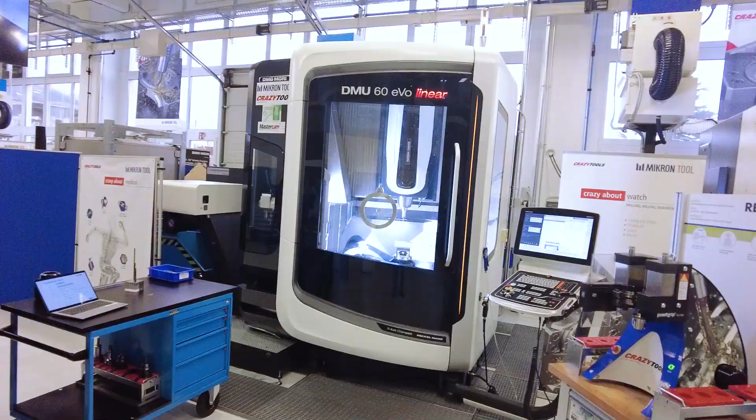What we do here is we develop all manufacturing solutions that we can deliver to our customers. We develop crazy tools, cutting tools, of course, specific for tough materials, tough applications, but also we develop complete machining processes, which can also be implemented by our customers.

In a previous lifetime, I had the great opportunity to work with some of your tools, and I was drilling titanium at about, I want to say, 0.25 millimeter. And everyone says, you must peck. You're going 50,000 RPM. And I gave my friends at Crazy Drill, you guys, a call, and I was like, hey, I have a problem. Can you help me? And sure enough, we plowed right through it, through titanium. My mind was blown, and when you guys gave MTDCNC a call in partnership with Rego-Fix, I was super excited to be here. Do you have any examples like that?

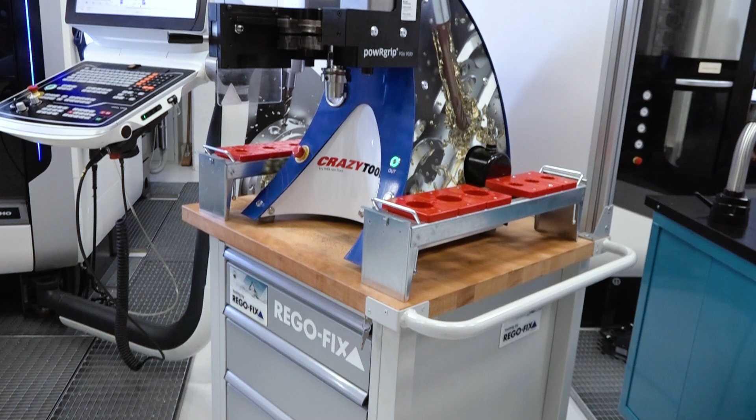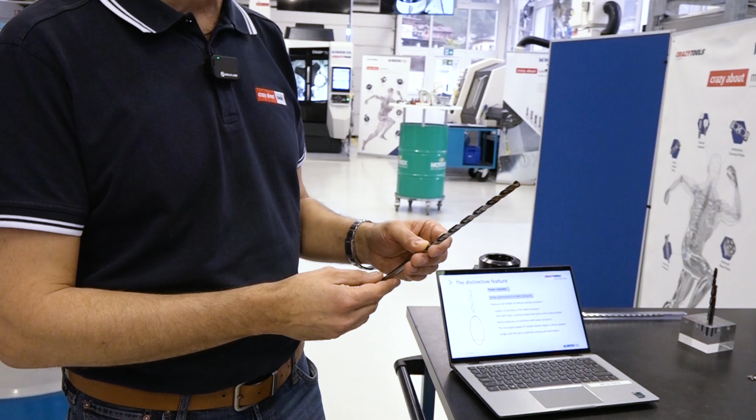Yeah, of course. So first of all, problem solving is really our daily bread and butter. We deal constantly with highly difficult requirements from customers. We have right now drilling in stainless steel, 316L deep drilling, and we can show this. We have a specifically developed Crazy Drill Cool for stainless steel. Wow. With a specific design of the cooling channel, we could improve the coolant flow by 4 times. This allows us to increase the cutting speed significantly, and the feed rate. So our customer now has a very efficient drilling process.

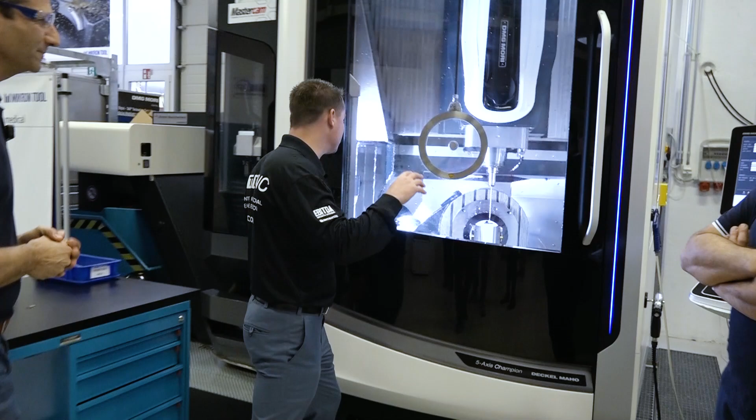Have you ever heard the saying, seeing is believing? Yeah. Can we take a look? Did you set something up for us today on the machine to see this? Yeah, absolutely. That's ready for you. Let's invite the audience in to take a look. Is this going to plow through that material? Yeah, of course. We are not pecking. It's one-shot drilling. And we have 250 surface feet per minute and 20 inches per minute feed rate.

Alberto, are you like me in the sense that something like this, one, I get chill bumps, and two, I find it so sexy. Do you find machining sexy? Yeah, of course. We also find tough challenges really sexy. We love to machine tough materials. Sometimes it's a headache, of course, but we challenge ourselves, and we love that customers challenge us so that we can develop crazy tools. Well, you're a genius along with your team, of course. Let's not leave them out.

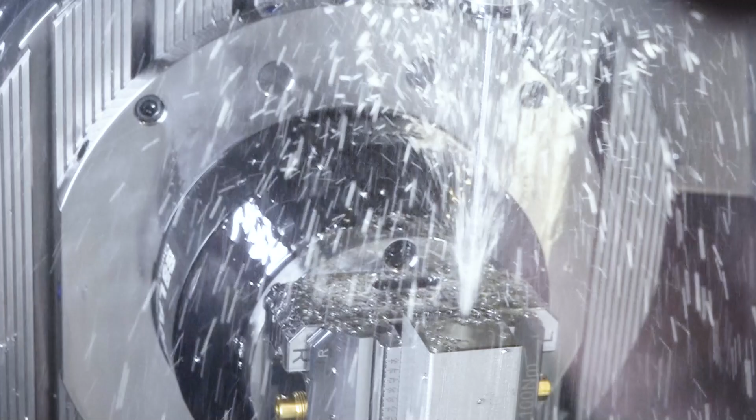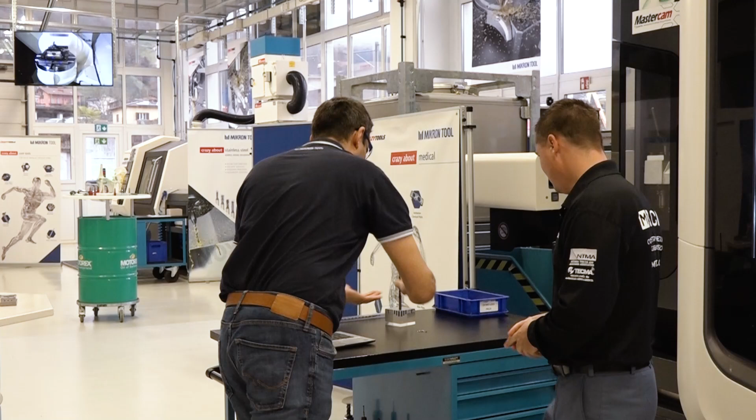You're a genius that helps create ideas and concepts that have traditionally been done in other ways. And this drill is so long that I would relate it to the gun drilling that I used to see. Is that traditional? Yeah, actually the request was to have something different, a real game changer related to gun drilling. So the idea was, okay, let's reconsider this process and develop something totally new, having massive coolant flow and a cutting edge design. This allows us to have short chips and perfect chip evacuation. For example, these are the chips we get on those materials, which was not the case before the development of this tool. It was long chips, high heat generation, so it was really a headache for the majority of our customers.

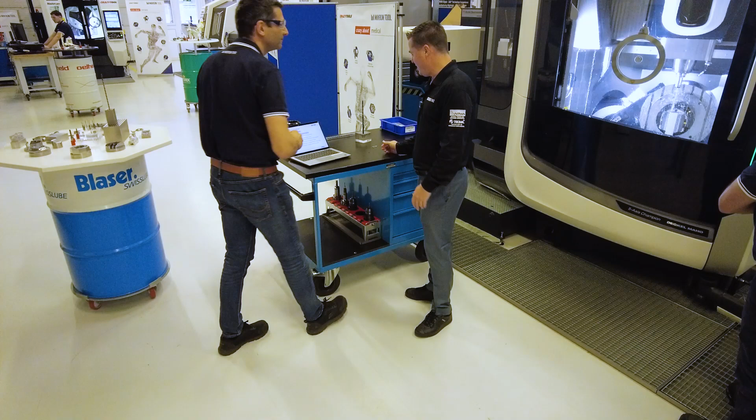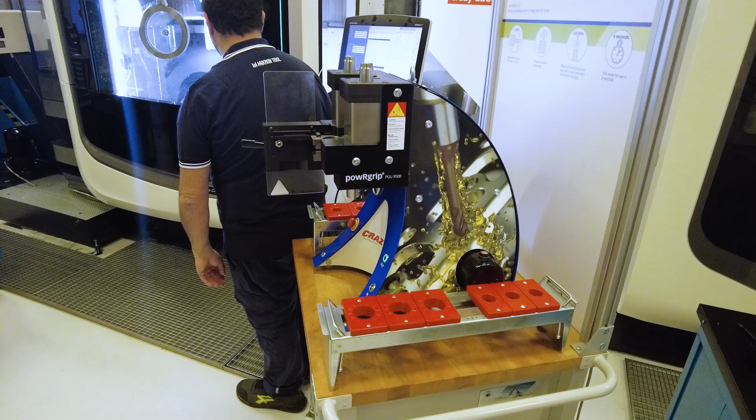Alberto, I'm going to tell you a little secret about me: when I walk around machine shops, I look in chip bins all the time just to see the answers to some of my questions. Correct. You can learn so much from a chip, can't you? Absolutely. The color, the shape, the size tells you a lot about how efficient your process is.

Well, it looks like we have a whole, I'm going to pull out my Aladdin, magic carpet ride. It looks like we have a whole new world over here as well.

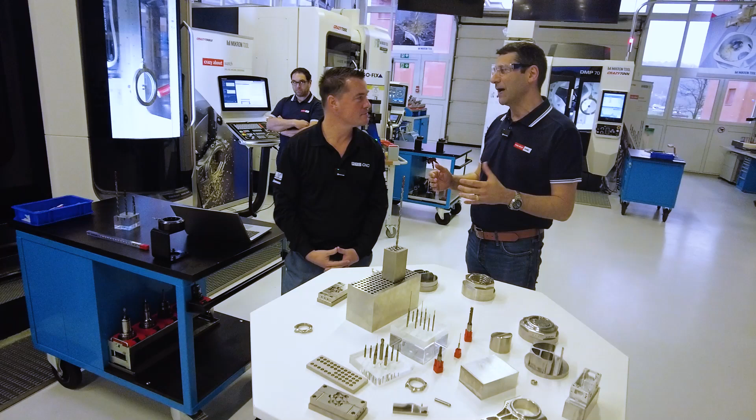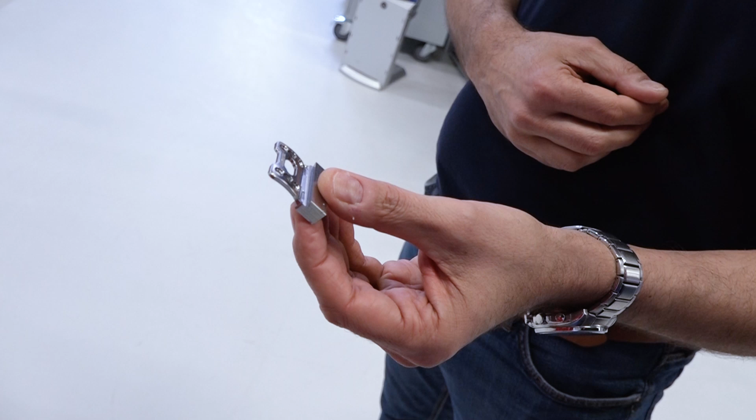Yeah, of course. Do you have some more setups for us to look at? As I told you, besides developing cutting tools, we are more and more involved in designing and developing complete machining processes. So, for example, we offer our customers to develop their machining process. For example, here we have a titanium medical part, a so-called anterior cervical plate, used for spine surgery. For our customer, we have developed the complete machining process, of course including a dedicated cutting tool solution. So we can have a look at how we proceed in such a project.

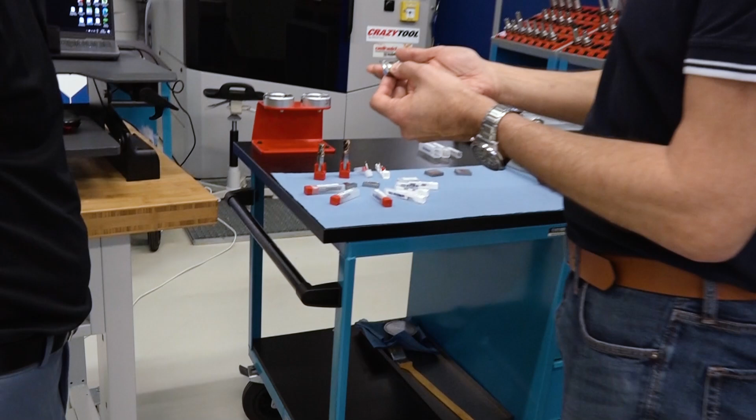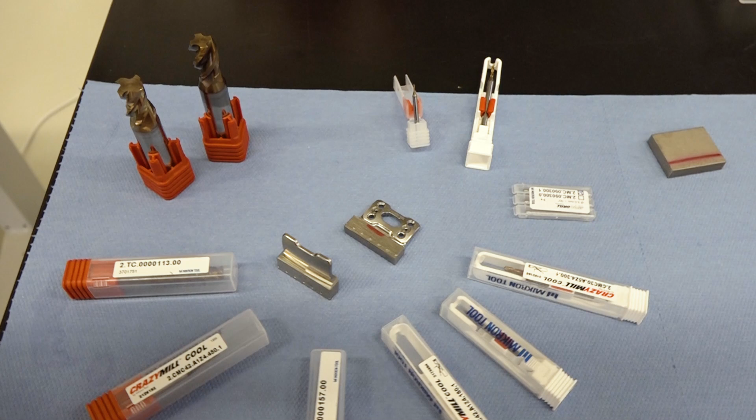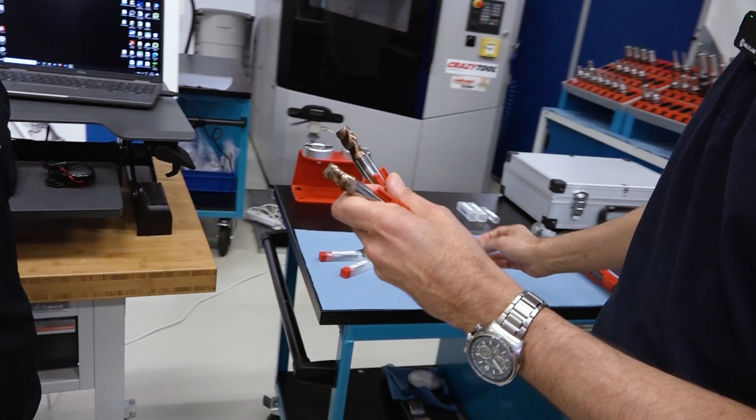Of course, we start by analyzing with CAM simulation, which allows us to design the machining strategy and the process. And then we go to the design of specific cutting tools to improve the machining of the part. For example, the majority of the milling time was dedicated to the finishing process. So to significantly reduce this finishing time and the overall machining time, we developed dedicated solutions, for example profile mills that allow us in a few seconds to generate a very nice shape with an extremely accurate surface finish.

We could improve the surface finish from 0.4 micron Ra value to 0.15. That means from 16 to 6 microinch, and we reduced the machining time by 85% in finishing. The overall manufacturing time we could reduce by 40%, from 15 minutes to 9 minutes. That's really a game changer for our customer. They can produce more with the same machine, or they can increase their annual volume significantly, reducing the manufacturing cost. Even if it's medical, the pressure on cost is high, not only on automotive parts.

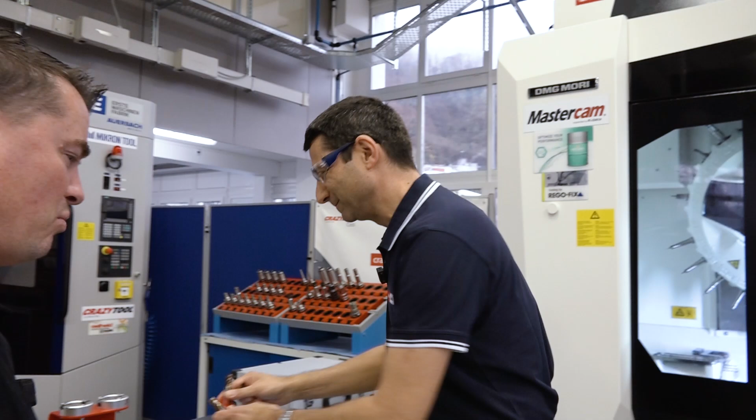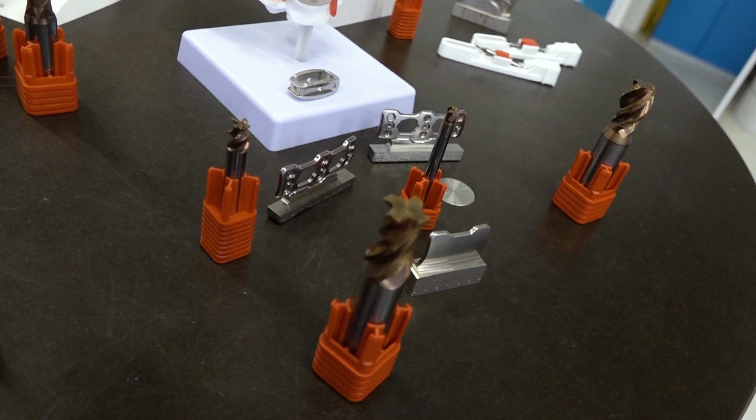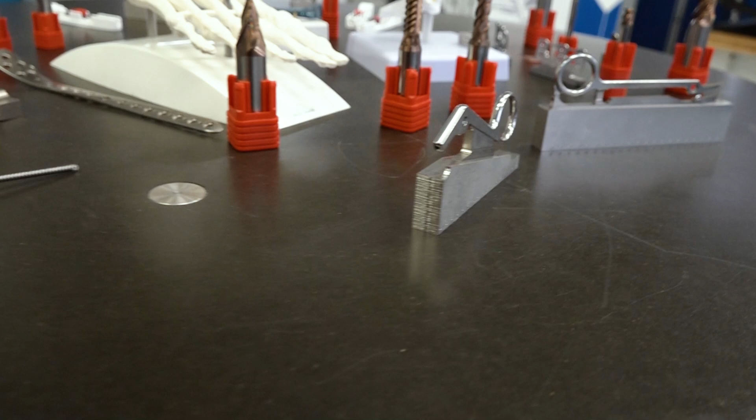Alberto, the way you describe this, although we've walked into Mikron Tool and you've shown off some of your amazing cutting tools already, it almost seems like you're a solutions provider that receives a request from a client that's having a problem. Yeah. And you go, we're gonna figure out a solution for you. And making tools is maybe the second or third supporting aspect to creating the solution for that partner. Is that what it is? You are absolutely right. Yes, of course.

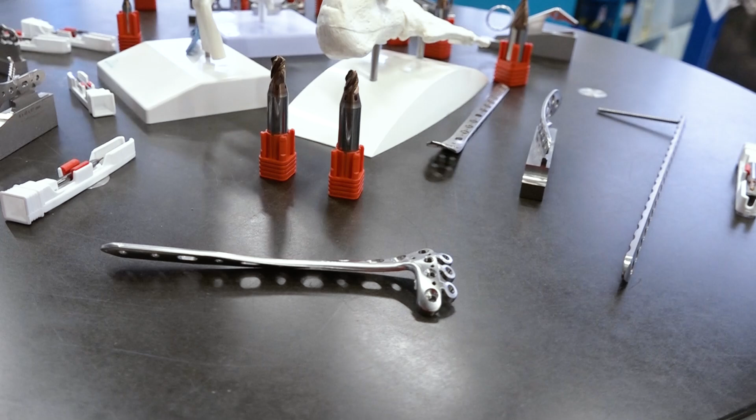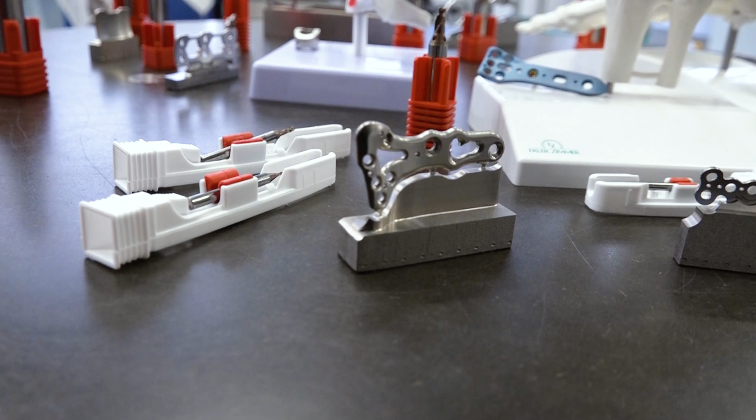If we want to significantly improve our machining process, we need to consider all elements in the process: the machine, the cutting tools, the tool holders, the coolant, the programs, the strategies we apply. Only if we consider all elements in a holistic way can we really improve processes that have been used for decades. People say we did it the same way for the last 10 years, how can you improve this? And the crazy thing is that we normally start to think out of the box. Let's say, okay, let's try something new.

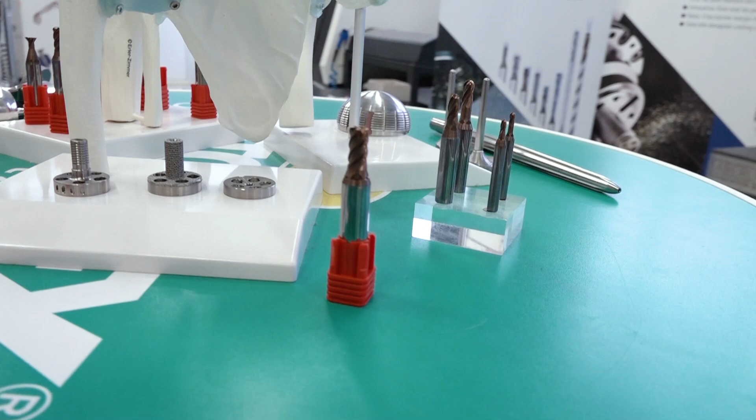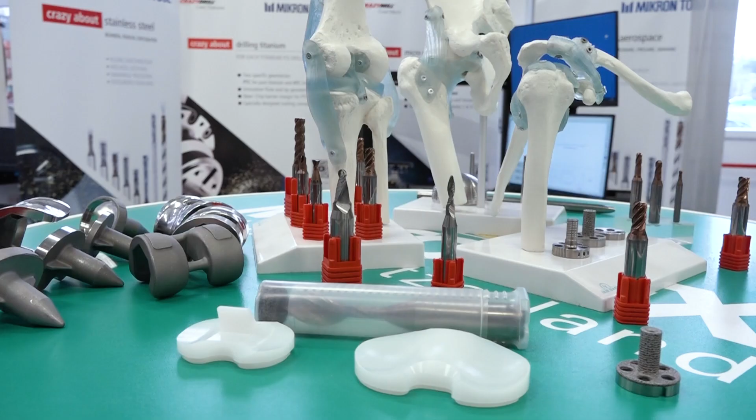Let's try a new cutting tool solution. Let's try a new strategy. Of course, in consideration of the machining requirements of the customers and all boundary conditions. We need to consider what the customer wants to use, of course. But besides that, we are sometimes really crazy, and we jump from one idea to the other, and then we mix it all together and provide a complete solution to our customer.

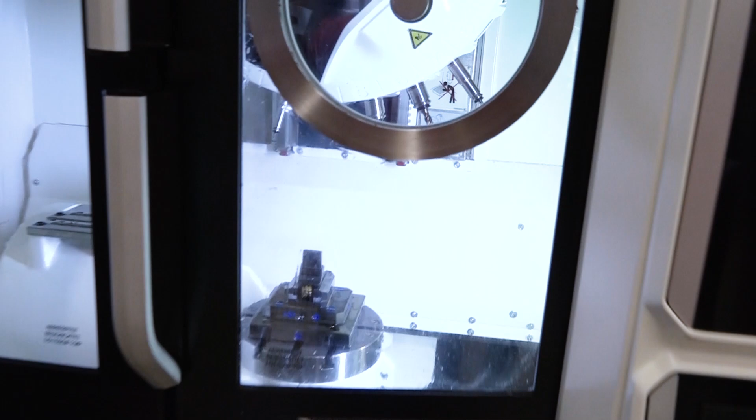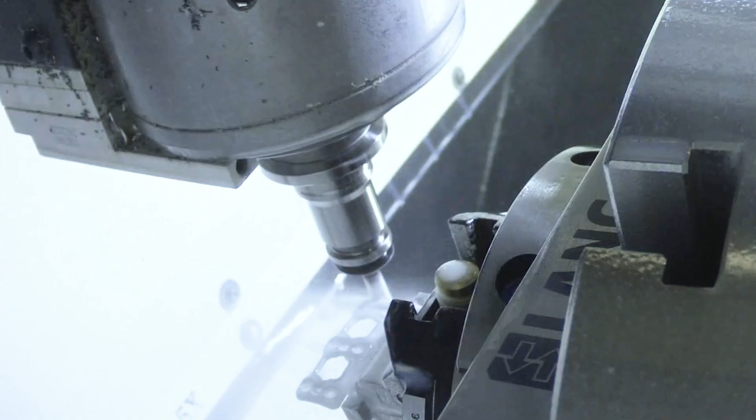Let's have a look at the machining. Yeah, you can start the machining. That's real life. This is titanium grade 2, low profile clamping, and we start, you see, with the roughing operation. We have coolant through our tools, so even in milling we have a really highly effective flow of coolant. It is titanium and the coolant right now is oil; you see we have the flow, which allows us very high cutting speed. We have no risk of overheating of the cutting edges, no overheating of the part.

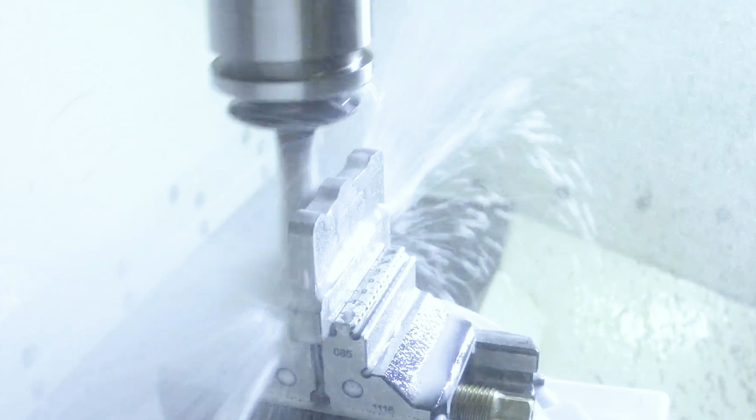And for example, even in drilling operation in titanium, such a thin part, our customer had a problem that in drilling, you have a high risk because of the feed force of the drills to displace or deform the part. So we developed a new cutting tool, a new drill specifically designed for titanium to reduce the feed force to allow us to drill thin wall parts like an orthopedic plate. And that's also a new approach, considering all aspects, considering all requirements of the process.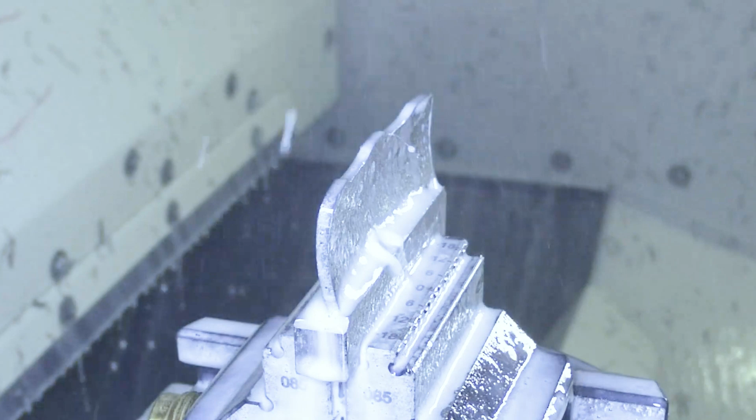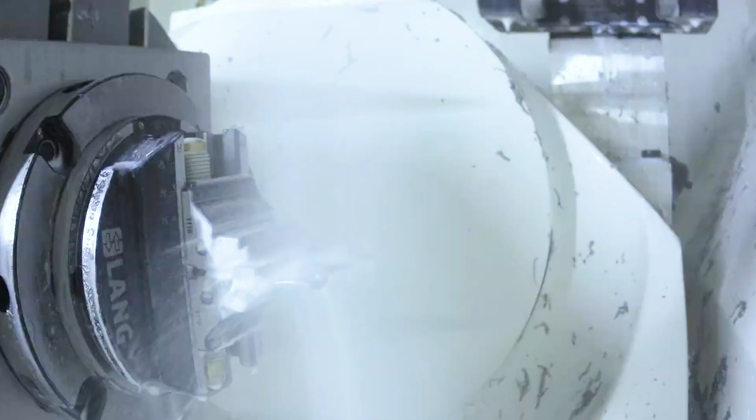Right now, here we have our convex mill. So you see, now we are finishing the surface in just a couple of passes instead of using copy milling by ball mill, which was about 3 times more time. And you see, this is a very compact machine, a small spindle, but you are able to apply a large tool because also the cutting strategies are, let's say, tailored to the machine size.

Alberto, they warned me I was going to walk into something crazy. Yeah, and you have proven that to be true. I hope now that we can show to you and to your audience that, of course, reconsidering processes and taking the time and really thinking sometimes out of the box may be a dramatic advantage for customers.

Yeah, there's so many thoughts that are going through my head as you're describing, and I didn't want to interrupt you at all, but one of my least favorite sayings in the whole wide world is, we've always done it that way. It is one of the more frustrating things. That is not how we succeed. We must embrace companies like Mikron, like you guys, and say there are possibilities out there. I mean, so beyond frustrating.

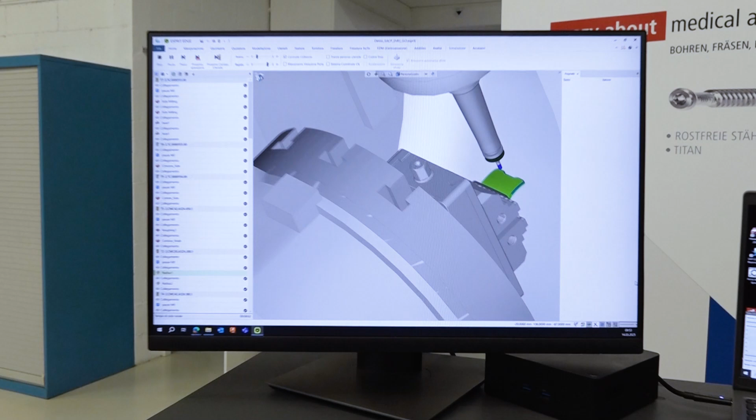And I know we're gonna go to the measuring area over here. Yeah, and the other thing I want to bring up, Alberto, on the way to the measuring area is I'm actually walking around with a cracked rib right now. So thank you for working on the medical stuff for us, because as my knees and ankles get worse and worse, I'm gonna need you in my life.

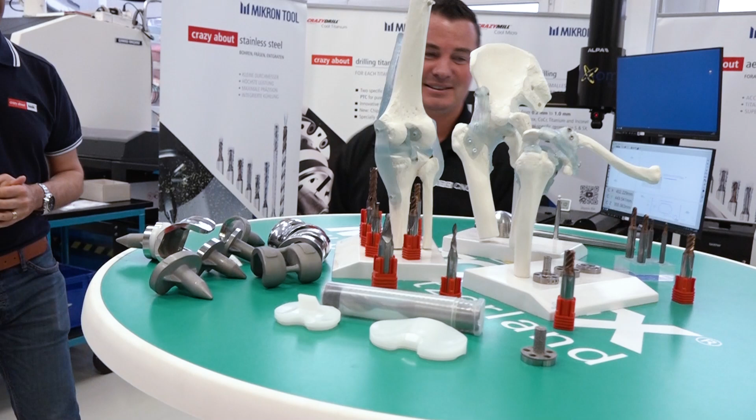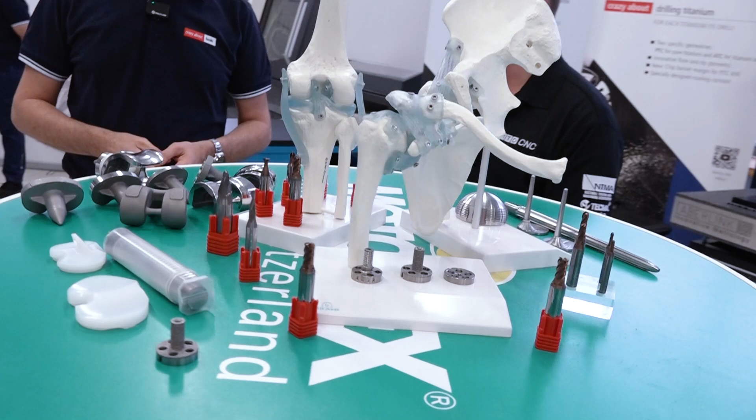Hopefully not, hopefully not. Of course, here we have a bunch of examples. For example, knee implants, shoulder implants. We have hip implants, and that's the major, let's say, high runner for orthopedic companies. And of course, we need replacements. We need spare parts in our bodies. People do a lot of sport. People get older and older. We need those kinds. And for us, it's really a nice challenge to improve these machining processes.

Yeah, thank you for doing that. These are all things I believe are going to be my body very soon. I might be the next Iron Man, next Bionic Man. Maybe without all the cool weapons, though. We can make it a new Avengers. I like that. Anything you want to describe on this before we slide over to our next area? People doing this for us. Oh my gosh, and what's his name? Marco. Marco, thank you so much for being here, my friend.

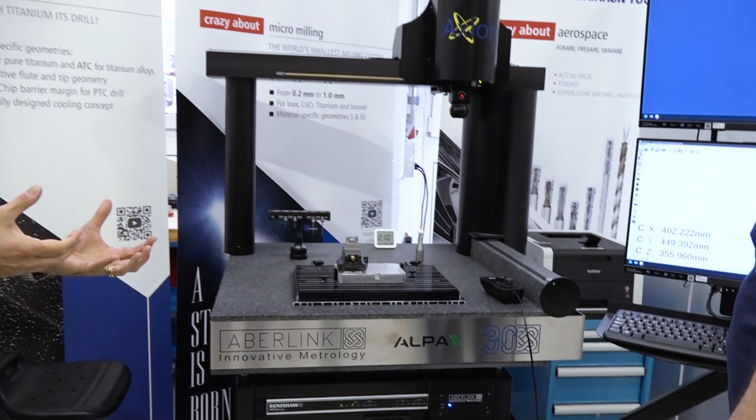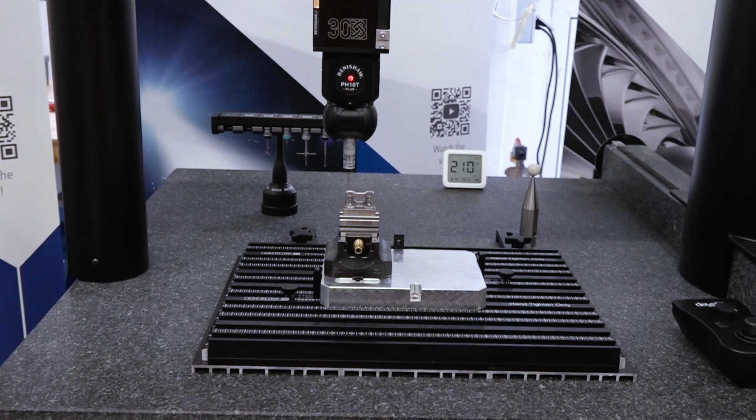Okay, let's have a look. Of course, what we do for our customer, we need to check if we can achieve the quality in the precision of the part, the surface quality. Of course, customers want to improve the machining process with the same quality of the part or improve the quality of the parts. That's our goal. So by CMM, of course, we need to check all critical features of the parts according to the requirements, so that we can deliver a pre-validated process, even for

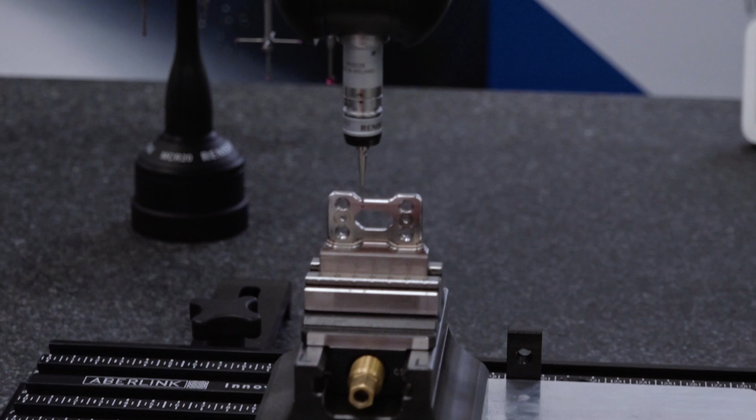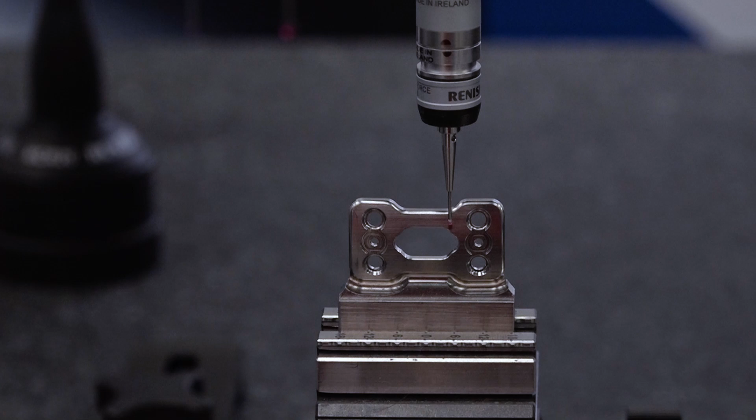medical companies. What we do, of course, is not the final validation. This will be done at customer side, but we do a pre-validation of the process. We can check the process consistency. It's not just a one-time process. It's a multiple-time process that we test. So we normally do several tens of parts, so that we can evaluate the process consistency along several machining hours.

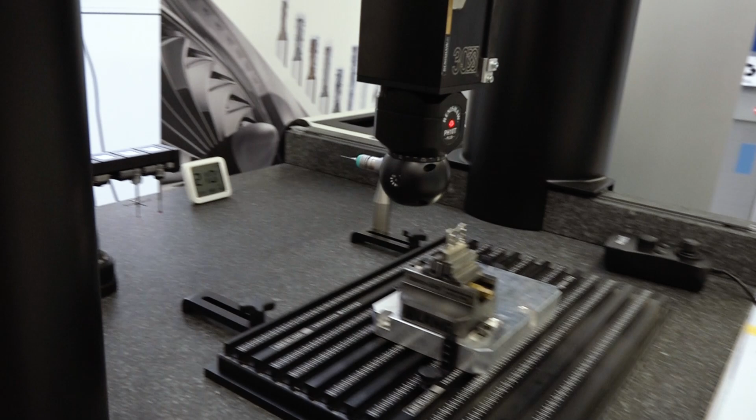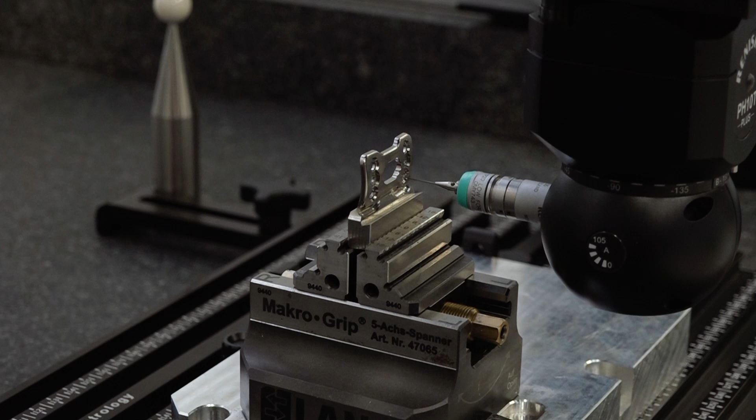I'm impressed, my friend. This tour has been incredible. I know there's so much more to show off here. Of course. You have, I believe, several of your colleagues that are going to continue to show us other areas of Mikron Tool. Absolutely. Because here is actually the final of the process. Are we going in reverse? Yeah, we go reverse, of course. We go where we use the tools, and now we go to see how we make the tools, the crazy tools that are so efficient and high performing in the most challenging applications.

So since we're going in reverse, you may not have noticed, but maybe I should put these back as well. All right, my friends, let's head off to the next area. Okay.

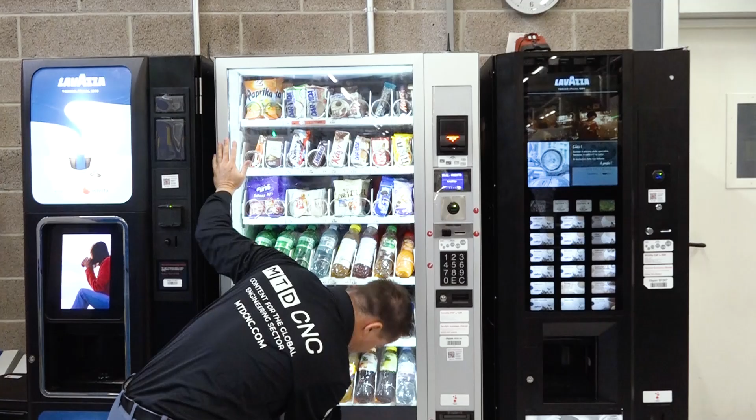Hey, Tony. Yeah, what are you doing here? Are we here to get snacks?

No, let's go see the production. You have to learn about our production! Oh, I would love to. There's a whole lot of beautiful blue machines here. But I thought we were here to get snacks. No? Later. Okay. So production and people, I think, are really important to Mikron Tool, right? So I show you our crazy tools, and now you have to learn how we do this.

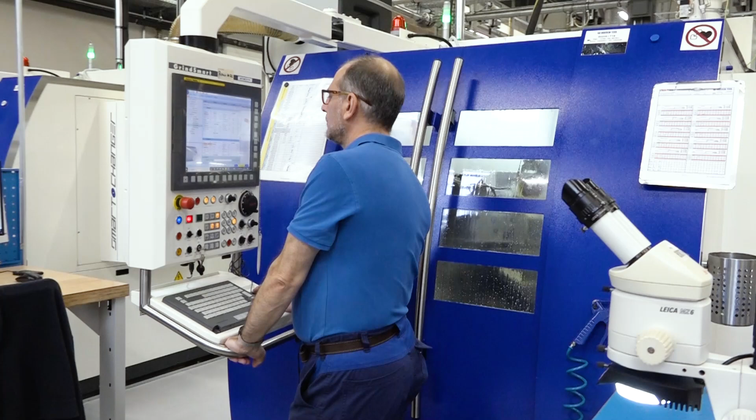Extremely high-performing cutting tools, high quality, of course. So to do this product, we need really state-of-the-art grinding machines. We need the right grinding wheel. We need the right programming. But all of this is useless without the highly skilled people. That's a fact. And when we hire people, even if they already have really good experience, it takes 2 years to get to the level that they can do the highly complicated cutting tools.

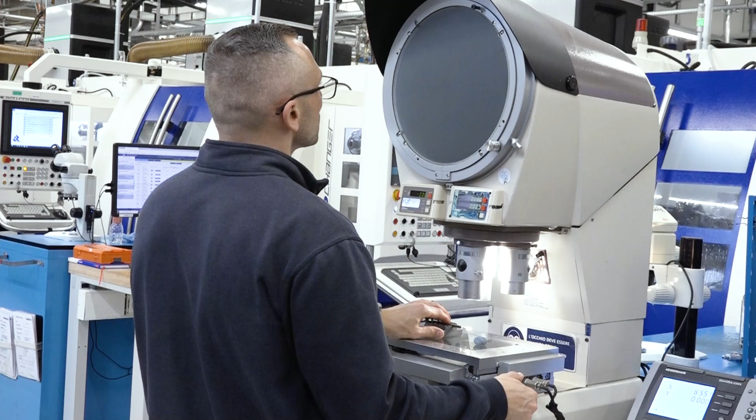Wow. Yeah, it's a really long journey for people to be able to approach, let's say, the craziest cutting tools we do, of course. We're repeating that word a lot, aren't we? That crazy word. Yeah, a lot.

We invest a lot in training, of course. We invest a lot in machinery, but we need to merge this together so that we can achieve the highest level of precision and quality. We've used the word crazy a lot. You mentioned the investment in people, the 2 years of training. How do you find people of this level? How do you make sure? You're making tools that no one else on this planet has maybe even considered making. What is the process of making sure that everyone is on the same page?

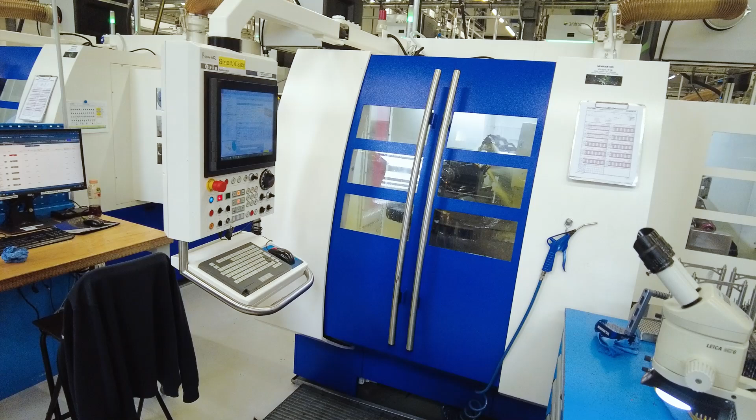Of course, we have different on-the-job training programs for operators and for young engineers. They have an initial contract. For example, young engineers have an 18-month program, and they see the complete production, the complete company actually. Young engineers also spend 6 months in our location in Germany or in the US, so they have an experience outside the company. That's really significant for us. It's the only way to find people, but also to have people that remain with the company for a long time. Yeah, that's the key factor.

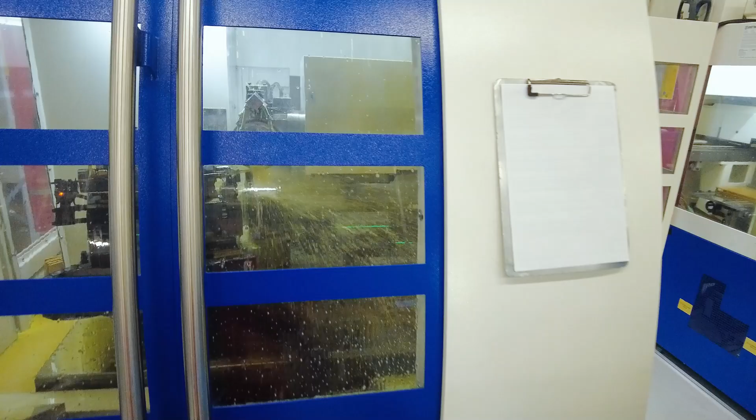It's not easy these days, and to hear you invest in your people, I want to expand on that a little bit, if it's okay with you, Alberto. We've had that discussion where your client is super important. You're providing a service to help them resolve an issue. The tooling is obviously important. We see machines all over the place; it feels like there's hundreds in here, right? Yeah, about hundreds. So knowing you have invested so much in your people, can you describe what the organization has created for all of the amazing people here, the relationship?

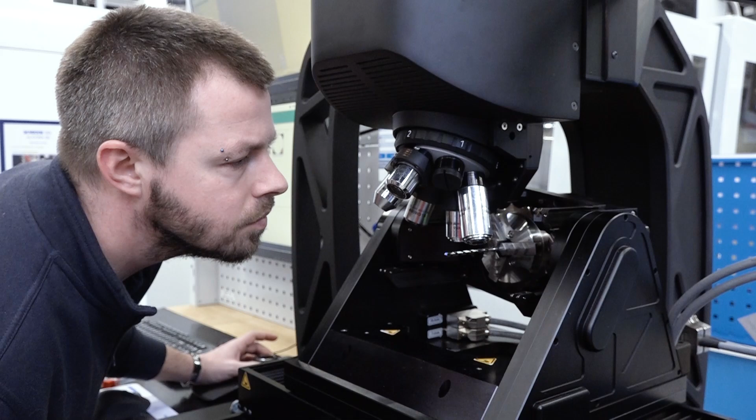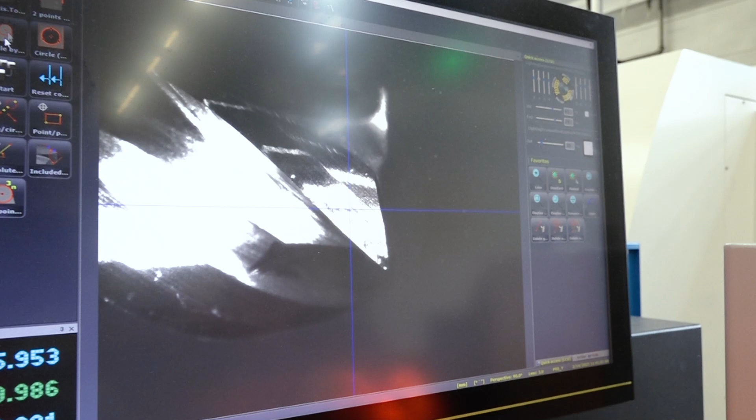Yeah, of course. People here are not just operators. They really need to understand the cutting tools, all levels of people you see here. We want the people to be part of the success also. So they need to know our cutting tools, how they behave, the performance, the importance of every single micro feature of the cutting tool. It's not just giving a production order to people and saying, do it. We train the people on our tools to understand the specific features and the performance, and they also need to manage all this high-technology machinery and equipment.

So the people here are not just loading and unloading parts, not at all. They are really highly skilled technicians. It takes great leadership to be able to do that. Absolutely, it takes leadership, but it also takes the right environment as a company. For sure.

People, we want people who love to come here. Monday morning, it's tough, but if people don't want to come here on Monday morning, something is wrong. Alberto, you made me think of something, and I have to bring this up to you because you mentioned wanting to come to work. And there is a conversation worldwide right now about how do we get people to want to be here. Correct. When I look here, I see clean floors. Yeah. I see smiling faces. I see cleanliness around all of these workstations. And I see cleanliness in the air as well from investing in that.

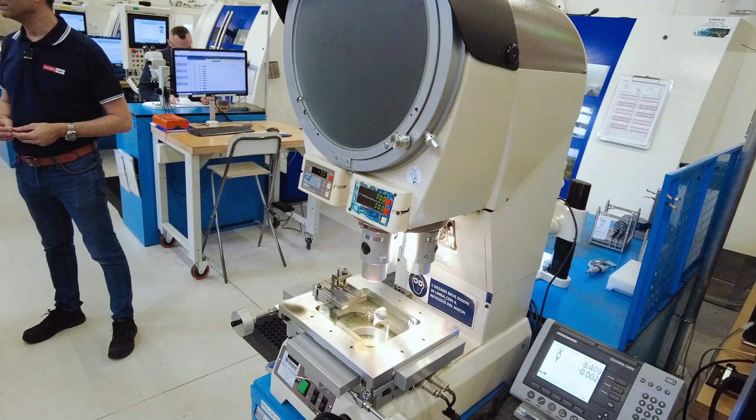Absolutely. Every piece is something that, I won't say I yell at the audience sometimes, but I certainly in a very strong voice go, we need these pieces of the puzzle to keep people happy and bring them to manufacturing. Absolutely. You have it all here. Especially young people in manufacturing, you need to provide high technology, high level of equipment, modern equipment, and an environment which is clean and also, let's say, relaxed in the meaning that it's not stressed. Yeah. Of course, people need to perform a lot, but in the right way. Modern equipment. I left that out.

All right. It looks like you have a tool in your hand. Would you like to describe? That's one of the tools we saw in action. It's our Crazy Drill Cool Titanium, specifically designed to drill titanium and titanium alloys. So of course, those machines are able to provide this kind of high technology tool with really micro features. All features you see inside. Unfortunately, I could not show you the technical drawings because they are covered by confidentiality. But I can tell you, there are a lot of micro features on such a tool.

I have some money here. Are you sure I can't pay you to see some of that? I will be immediately fired.

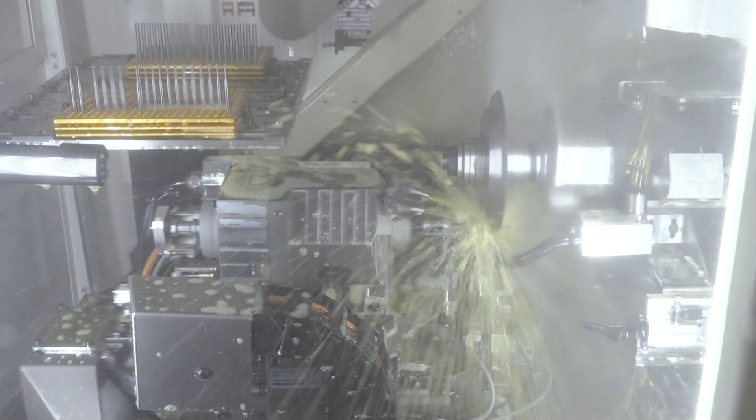No, there are a lot of features that people need to understand and control, of course. And to control all these micro features, for example, very important is the profile of the flutes and the surface finishing of the flutes. Only with accurate profile and extremely polished flutes do we have perfect chip evacuation in drilling, especially in tough material like titanium. So we need to control this, and we have really state-of-the-art digital scanning equipment like this one.

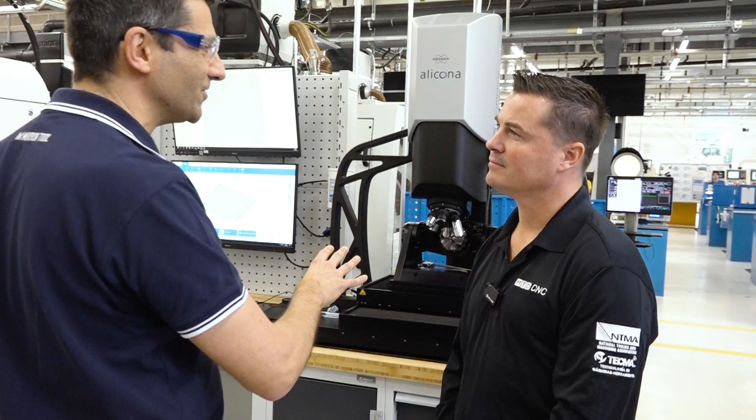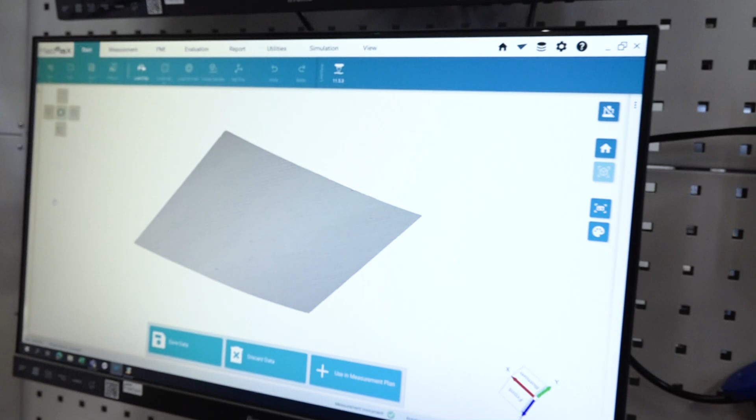With this equipment, our operators, not only engineers, also operators, have to use this and learn how to use this. It's a several $100,000 value. Whew. And with this equipment, we can scan the profile of the flute, check the profile accuracy, and also check the surface finishing, so that we can check if the value indicated in our drawing is correct, and maintain it over several hundred pieces produced. So maybe people see here quite a low level of automation.

Machines are loaded and unloaded by robot, but beside that, we see people. And that's how we maintain this extremely high precision and quality. We need people to manage this equipment, to control this, to do the fine-tuning. The fine-tuning that allows us to reach this high result is not made by artificial intelligence, it's not made by the machine itself, it's made by the people. Clever. We started this conversation off with people and production, and we ended with people and production. We're now looking at a machine worth hundreds of thousands of dollars.

I have to see how this is all designed. Is that possible? Absolutely. Let's go upstairs to the technical department. There are crazy people also there.

How we doing, Matteo? Hi, Tony. I apologize for bumping into you, but I was talking with Alberto, and we're doing everything in reverse today. We're going from the end of the process to the beginning, so I thought it might be fun to do my bad Michael Jackson moonwalk to bump into you. What are you working on?

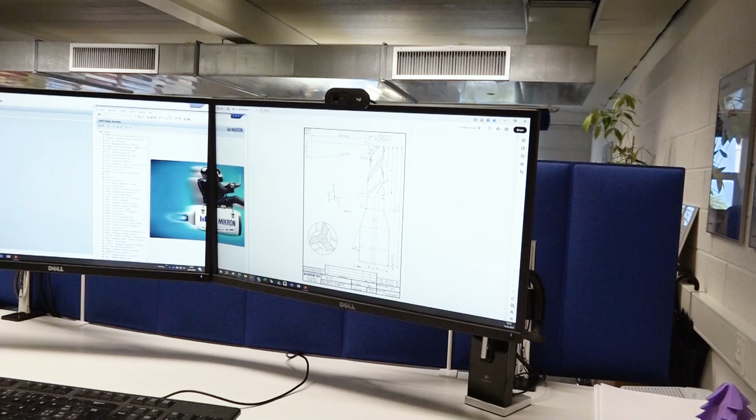We are in the technical engineering team. Basically, what we do is take all the requests from customers, and we provide a custom solution to their needs. So we have an expert team working daily to provide solutions: choosing material, coating, defining cutting geometries and the shape of the tool itself, and the process we have to use to produce the workpiece.

And at the end, we are providing a solution to the customer. So a drawing and all the necessary stuff that you need to know to then place the order.

So what I'm learning is you're the brains of the operation. Is this what you're telling me? You don't want to say it, do you? No, you don't want to get yourself in trouble with all the other amazing people here.

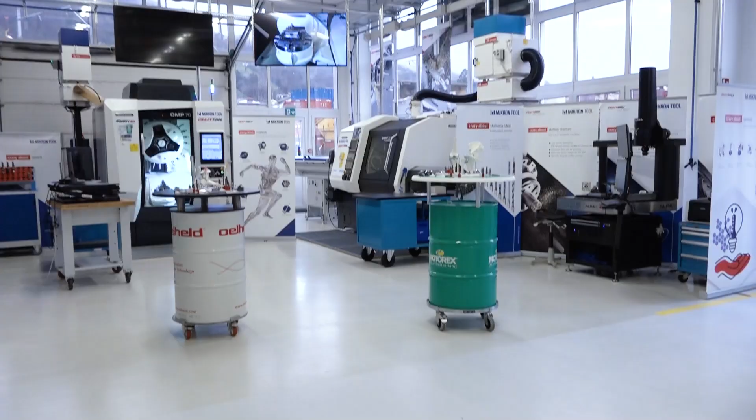But what a great concept to know that this is how it's all put together, because I had the great privilege to see kind of the R&D center and where they're running all the testing, the production, all about the people and coming together to make sure they're educated enough after a 2-year process to be able to run these machines, and then stepping a little bit more in reverse as I bumped into you to see how it's all designed. How long have you been doing this? I've been doing this for 15 years now. Wow. That's incredible.

And then once you're done here, where does it go from here? Here, we provide all the sketches, and then we are preparing for the programming team that they have to transform our request into a simulation. Then we are giving it to production to produce the tools.

Don't worry, I won't tell anyone that you're the brains of the operation. We're not just recording for the whole world or anything. Don't worry, your secret is safe with me. I think Ricardo's over here waiting for us as well, right? For sure, he can explain better than me what they are doing. Impossible. You've done an amazing job, Mateo. Thank you so much for your time. We'll see you again soon.

Ricardo, how are you, my friend? So good to see you. So good. How are you? So, Mateo was bragging about you. He said he was the brains of the operation. But over here, he didn't really say that, did he, guys? No, he didn't. I said it for him.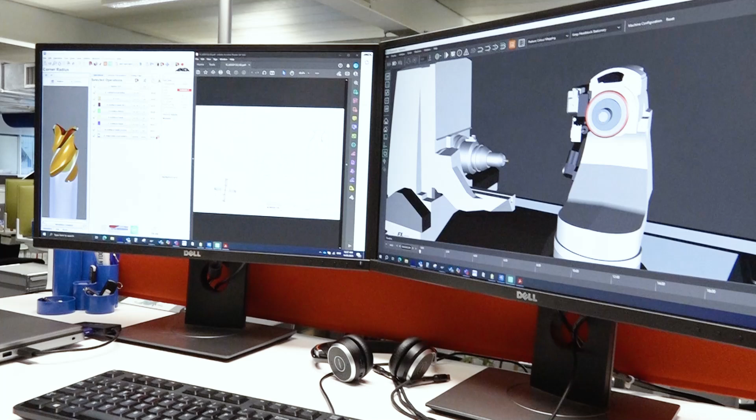But over here, you're doing the designing, right? Can you tell me a little bit more about what you're working on? So, I just received a crazy design from Mattia's team. We are doing this complex geometry end mill for an application for the technology center, and right here what we do is simulate the process of grinding before the actual grinding happens. So I can simulate everything concerning the grinding, like the wheel, the wheel pack, the machine fixture, all the geometries, and just like that I can simulate a complete tool.

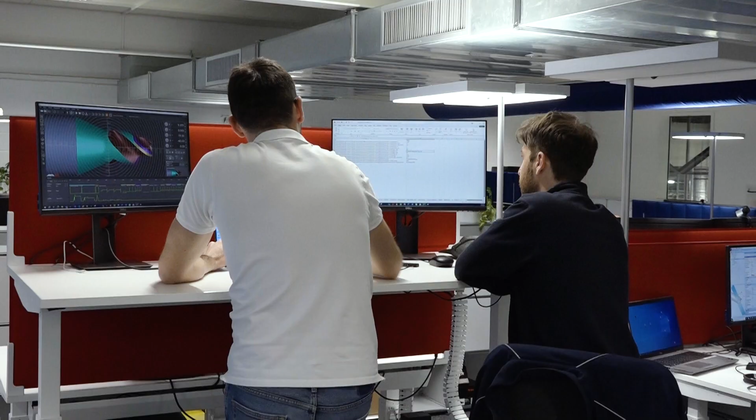Beautiful. There are a lot of details that go into this, like the wheel shape. You need to know about the machine kinematics. Really, a lot to do. Ricardo, I have a secret to tell you. So we're doing this entire video in reverse, which means I've already seen the future. Which means I know that this tool works down in your production and in your R&D. So good job. You're already doing amazing things.

Thank you. Of course. All right, my friends, we're now going to head over and see what these micro tools look like. And it's already been a crazy adventure, obviously in reverse. And we're really enjoying ourselves today. These guys have all been brave enough to share their stories, hop on camera, and explain to us something that we've never had cameras on before. So how exciting. Now let's head over and meet Alberto again for our final area.

We've made it to the micro tool world. I'm back with my buddy Alberto here, and I don't have any bad dad jokes to start this scene off with like some of the other scenes. We're really just gonna get into it, starting with this piece that's in your hand, aren't we?

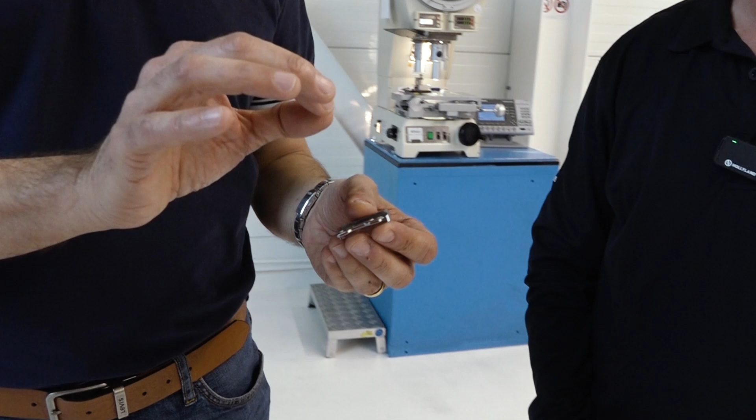Again, looking at our bone plates, our anterior cervical plate for spine operation, we have a lot of really tiny features on these parts. So we also need micro tools to machine this. For example, this small recess here for the locks is done by a 4 flute 0.4 millimeter mill. Ooh. And here we are in the department where micro tools are made. The largest ones done here are 1 millimeter in size, and we go down to 0.1 millimeters, 4 thou inches. That's incredible. Okay, I used the wrong word here. I've already learned.

That's crazy. That's not incredible, that's crazy, right?

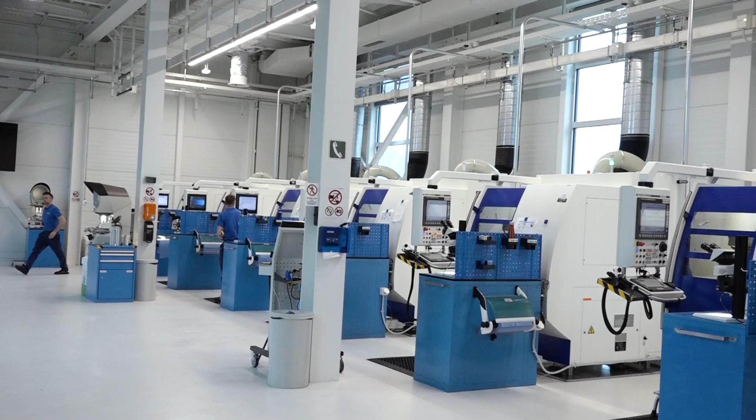That's right. And so here we have dedicated grinding machines, specifically developed to do micro tools. You see, we have them in a separate building, a separate area, and they have hydrostatic axes to move really smooth, because it's not only the size of the tool, but also the surface quality on small tools. We need really to work as smooth as possible.

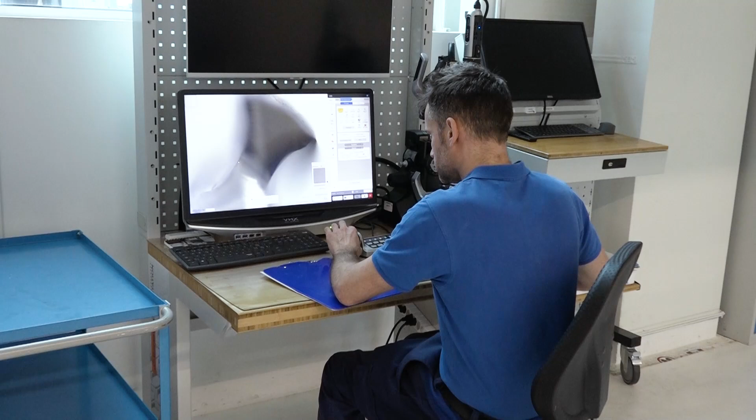And for that reason, we need not only the machine, but also the grinding wheels we are using. They have diamond grain size smaller than 5 micron. It's fascinating. Because otherwise the ground surface would be too rough for the tool, which has a negative impact on the tool stiffness and on the tool resistance.

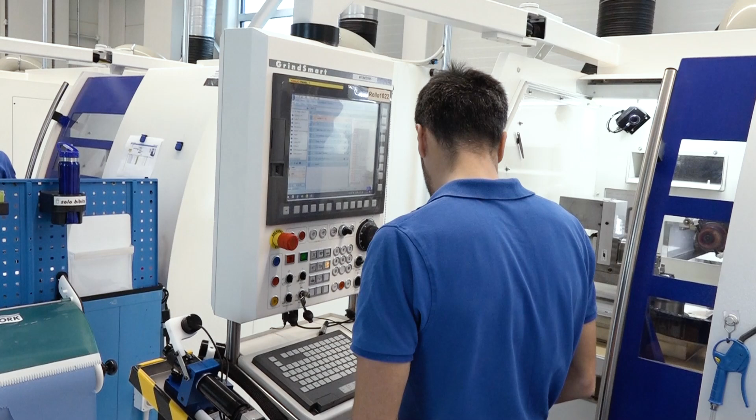Going through production with you, you emphasize the importance of people, quality and the training that goes into it. Talking with Mattia, he claimed he was the brains of the operation, but we're stepping in here, and I can imagine these people are pretty high quality as well. Absolutely. What goes into this? In this department, only really the highest skilled people come here. It's not just people hired yesterday coming here and trying to do micro tools. Couldn't imagine trying to. Absolutely. It would be a headache for them, and terrible for us.

But of course, after a long training and a long journey in the company, the best people come here to do micro tools. Because they need to manage in a perfect way the machine, but also the equipment. To check the quality and precision of those parts, we really need dedicated equipment.

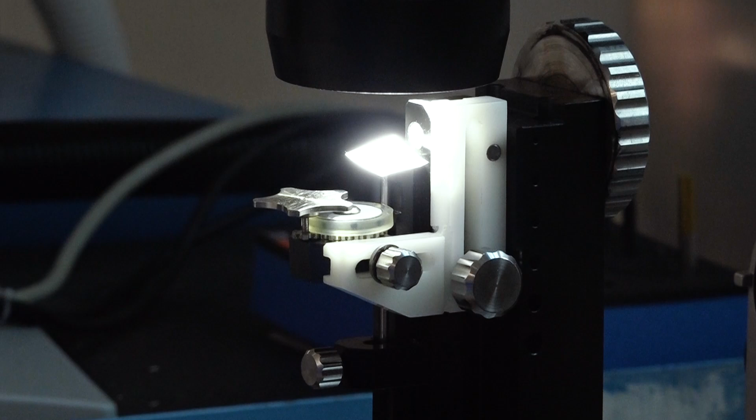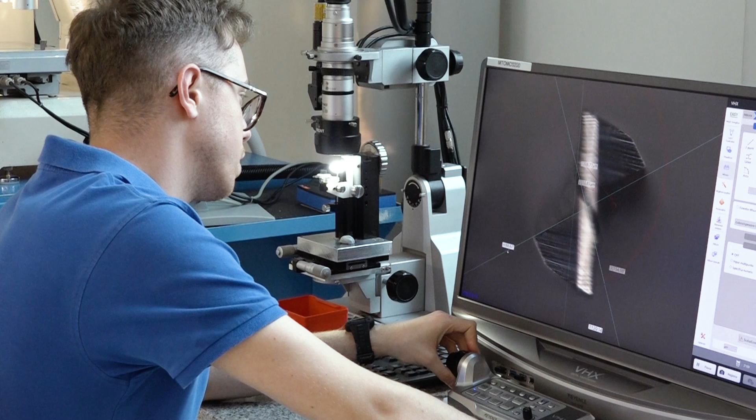Considering the long journey, we need to have young people here, so that we have continuity. I can't afford to have a 65-year-old man here as the only one capable of doing micro tools. Right. When he retires, we will... And then lose all that information. Correct. So we need to have young people continuously beside more experienced people. I would say not old, but people with higher experience together in a team so that they both grow. One in teaching, one in learning, and that's the key result.

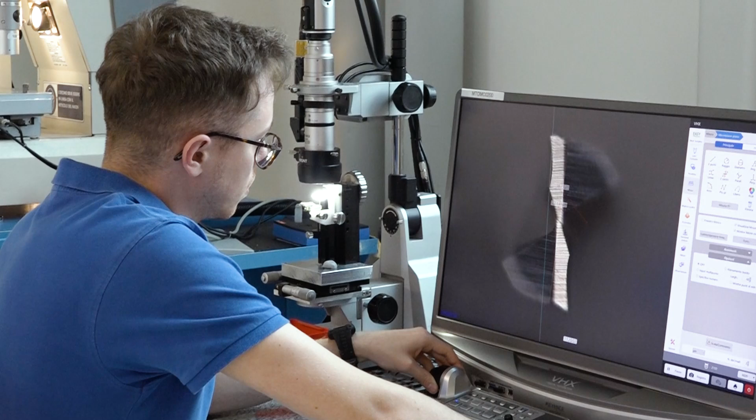Yeah, I would make the discussion that the whole world of manufacturing wants that, but you figured out how to do it. And that is, okay, I'm gonna do it again. I apologize. That is crazy! And we are doing crazy tools, so I have to emphasize that. So, all right, let's finish up here, my friend.

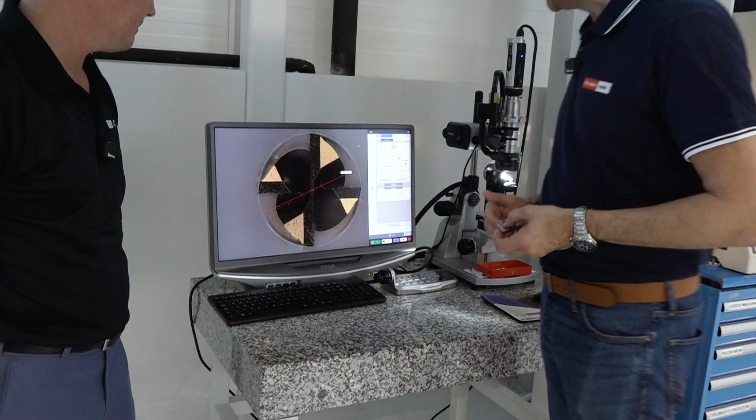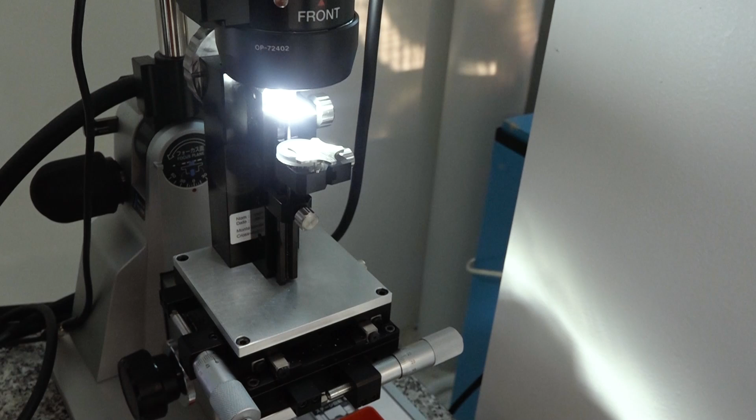So the 4-flute mills I told you about do this part, a feature of this part. So here we have this ball tool, and it's 0.4 millimeter, 4 flutes. This is already coated, and the people need to measure the features of these tools with the digital microscope. We have 2,500 magnification on those optical microscopes.

I am thoroughly impressed from start to finish. Your team, your colleagues, your growth, your expansion, your investment in technology, your investment in people and service. Thank you so much for offering us this tour, for opening your doors to the camera and truly taking the time to share with the audience the perfection and the crazy that goes into Mikron Tool.

We are really proud to be here, to work for Mikron Tool and to serve our customers. It may be a titanium bone plate, an aerospace turbine blade in super alloy, a watch case in stainless steel. We are really proud to serve our customers with high-end cutting solutions.